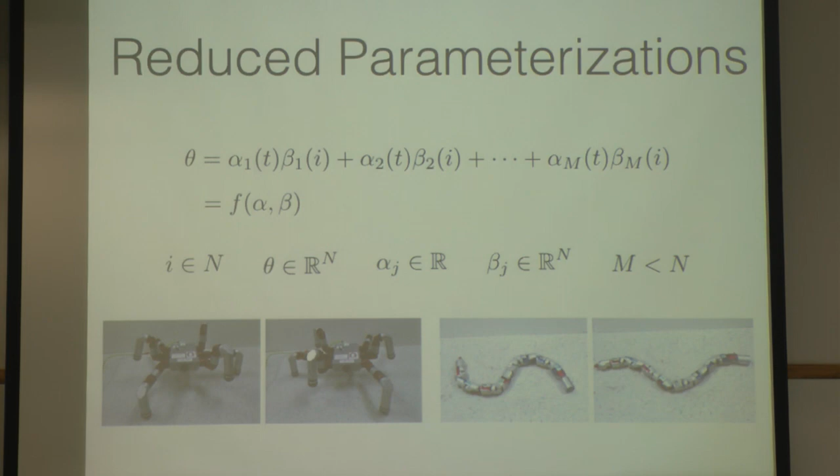So what to do? The prime idea would be to do some sort of dimensionality reduction. Can I take an n-dimensional space, a very complicated robot with an 18-dimensional or 16-dimensional shape space, and project down into a subspace, a low-dimensional subspace of this high-dimensional space? If I can do that reasonably using some sort of basis functions, represented by beta in this case, then I can use similar parameters, almost the same concept, to now define good locomotion patterns in these subspaces, parameterized good locomotion patterns.

So what does this actually look like in a real example? In this space, the basis functions for this walking robot correspond to stances at different portions of my gait cycle. For a low amplitude path or gait through this particular parameterized space, which is a subspace of my overall shape space, I get these small steps. If I increase the amplitude of my motion, I remain in the same subspace - I'm still in this alternating tripod, but now I've used a single parameter to scale up my stride length.

In this case, these shape basis functions are no longer stances in a walking gait. The basis functions are themselves these sinusoidal-looking fixed serpenoid bases. So the question might be, where do shapes come from in general? You've given two examples, relatively simple ones, but if I don't want to just be a serpenoid or an alternating tripod for the rest of my life, where can I go to actually discover shapes in general?

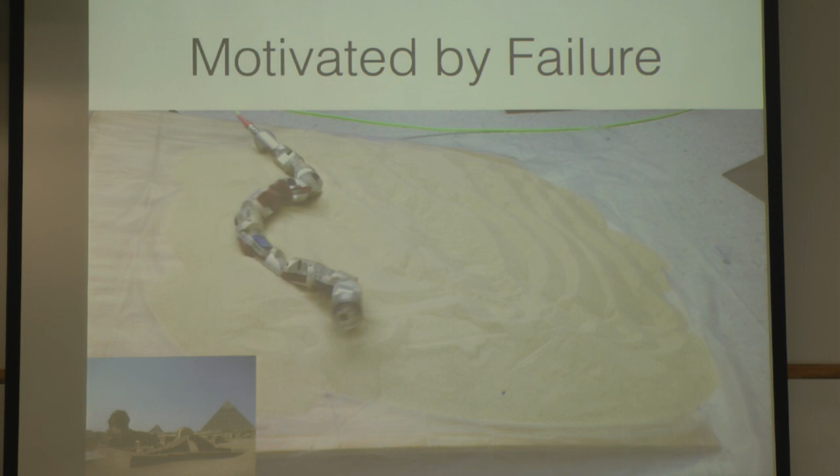It turns out that locomoting with this particular robot on sand, on a granular surface, when it's flat, is not that much of a problem. But when you introduce a slope, it becomes very difficult to move.

So a number of years ago we had been working with Dan Goldman, who's a professor at Georgia Tech. Dan is a physics of living systems professor, actually in the physics department. He's not a biologist, but he's very interested in studying the physics of granular material. Dan had been looking at a particular system and how it moves on sand.

This is a biological snake, a desert-dwelling snake. It's a side-winding snake in general. This snake is amazing — it's not even just going up slopes, it's maneuvering on the slopes.

Another thing is that snakes are principally dissipative, which means that looking at their kinematics tells you almost everything you need to know about how they move, at least in terms of how they change their curvature to produce net locomotion.

Using this fact, we took recourse to the literature, and there's an entire branch of learning effectively called tensor factorization. The nice part about this is that it does a multi-dimensional SVD. So for us, having multiple dimensions, time and space, these types of learning techniques will actually go and learn the basis functions. So what you're doing is projecting a lot of biological data onto a set of spatial basis functions as well as some temporal parameters.

The problem with this — and this is a result that Chaohui Gong had some beautiful insight on — is that when you're doing SVD in multiple dimensions, your choice of basis function in one dimension will actually affect your choice of basis function in the other dimension. So it turns out to be an NP-hard problem.

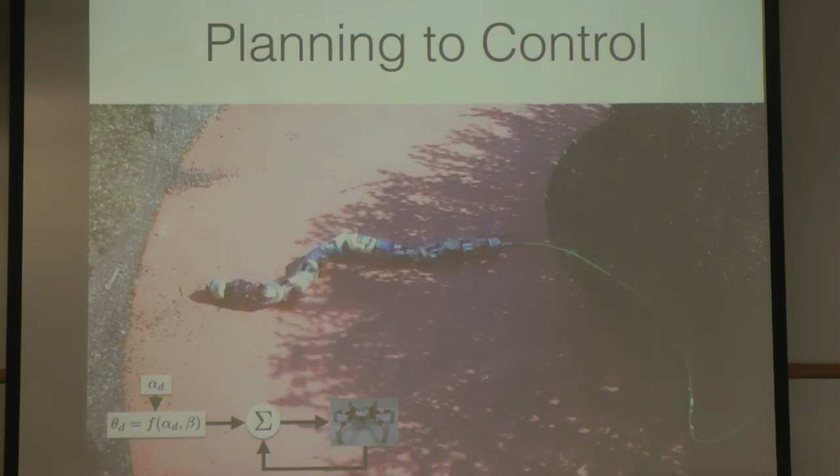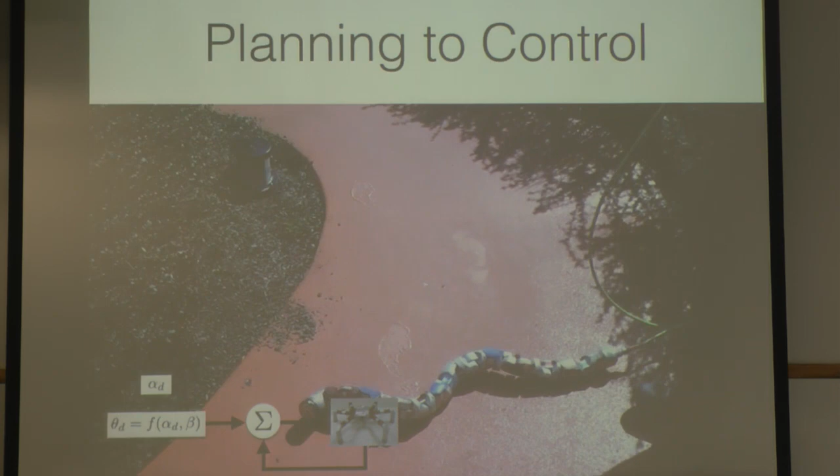This is from a garden over here on campus, with this winding path. So the real question was, what's the good way to go from these libraries of motions for different robots down to actually controlling robots? The first order approximation would be, can I use these low dimensional parameterizations to go and generate desired joint angles that end up being references for low level PID loops, getting sent directly to the mechanism, or different mechanisms.

So what happens when you put the robots in confined spaces?

So perhaps not surprisingly, the robots almost 90% of the time just immediately get stuck. I designed basically a motion for this system in free space, and I put it in a confined space, and not surprisingly, most of the time it spent stuck. Sometimes it'll fortuitously figure out a path, but that does not happen very often. So we again went back and asked ourselves, what's the problem here?

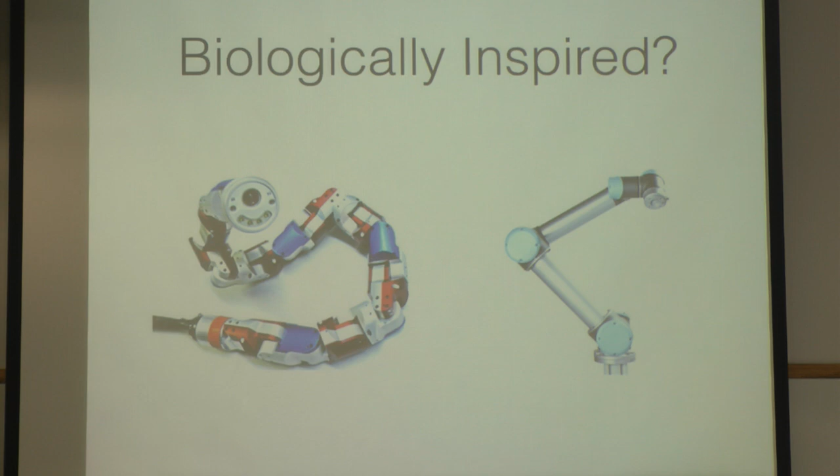It turns out that this is almost the exact complement to what I was showing in that very first video. Where in the first video, I was doing a purely force-controlled strategy. Here I'm doing a purely position-controlled strategy. So in one, there was not enough structure. In this one, there is literally way too much structure. So how do I get around this problem? How do I find a happy medium between these two? How can I be both compliant as well as rigid simultaneously?

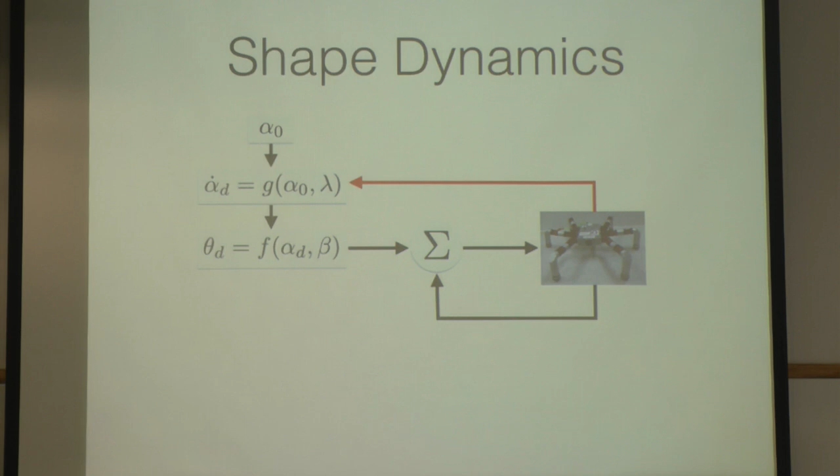For us, the answer was we needed to add another layer in our control paradigm. We wanted to be able to dynamically warp our shapes in response to the external environment. So imagine, from those previous slides, I have this whole family of good locomotion patterns. Can I use some sort of feedback from the environment to take and warp and bend that particularly good locomotion pattern to fit a particular set of environmental circumstances?

It turns out this idea, which we thought was great at the beginning, and we had come up with this big framework for thinking about how to do control — it turns out people have been doing this for quite some time. In particular, the CPG community does something very similar to this, although how the feedback actually enters in is a point for discussion if anyone would like to know more about that.

This is work that Auke Ijspeert has been doing for a number of years. He's done great work in getting lots of different systems — walking systems, slithering systems, swimming systems — and transitions between the two. He's done amazing work in getting these systems to do things like gait transitions, very smooth gait transitions.

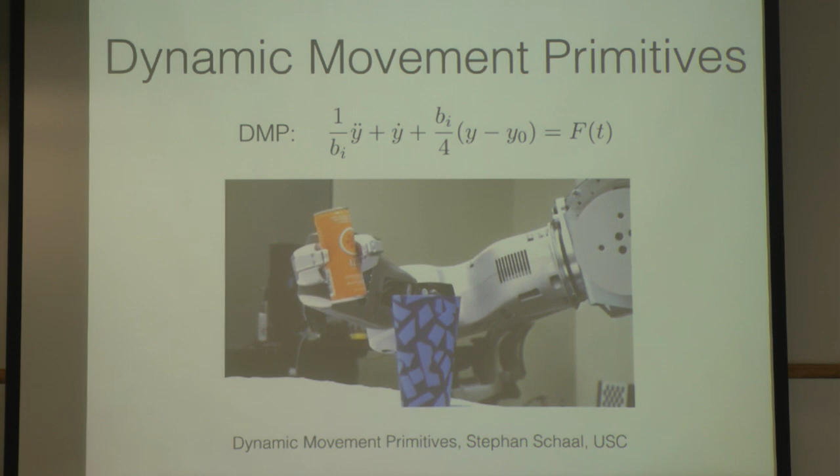Auke wrote a paper with Stephan Schaal in 2012, where they drew a relationship between a broader concept called dynamic movement primitives and CPGs, where a CPG effectively acts like a rhythmic dynamic movement primitive. Dynamic movement primitives are this beautiful idea, and Stephan has been working on them for a very long time. I think the big original paper goes back to 2002, but he'd been working on it before that.

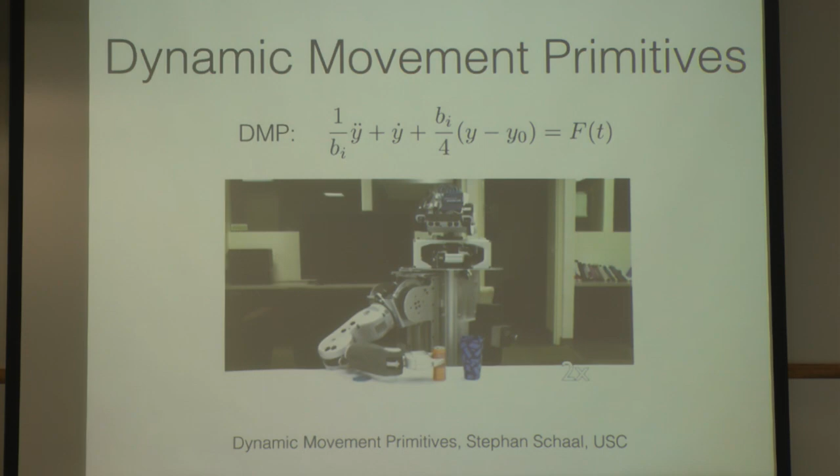The idea behind a DMP is that you can take some nominal behavior, and by changing this function f on the right-hand side of the equation at the top, you can take that nominal behavior in real time and mold it, stretch it, and form it to a new set of environmental circumstances that weren't there when you were originally planning this nominal task. It works ridiculously well, and it works in real time.

In this particular video, the cups can be moved. So you're changing the parameters inside the environment, but the behavior is automatically adapting to them.

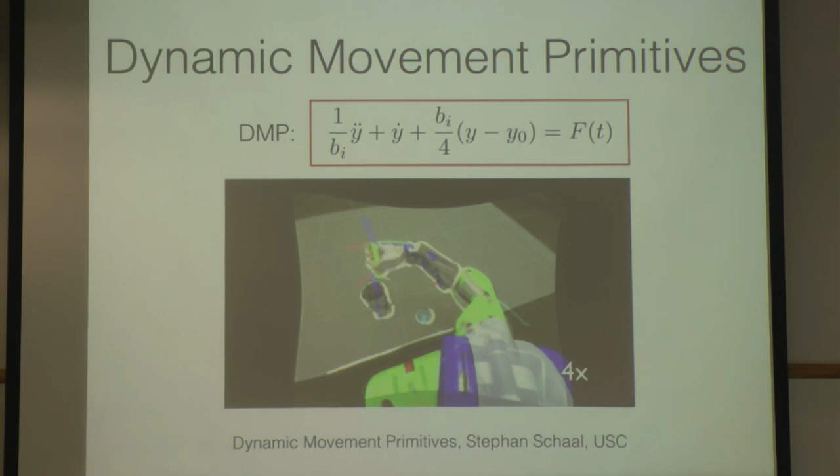The nice part about DMPs for us, in thinking about how to control the types of robots we're really interested in, is you can consider an admittance controller written down in closed loop form. An admittance controller or an impedance controller are actually special cases of a DMP — they have the exact same dynamic form. The main difference is that my forcing function for an admittance controller is specifically defined in terms of a measured joint torque. Same exact form.

So we went and started to try to implement this on the robots, and we ended up with results very similar to what I was showing in that very first video. It was this decentralized version — we implemented it in the joint space, so we didn't have correlation between joints. They weren't sharing information.

You end up with this very decentralized system, and it turns out to work decently well, but there isn't enough structure for the system to continue moving while being compliant. So how did we get around this?

We go back to our shape functions. The whole idea here, to remind you, is that we project ourselves onto some low-dimensional version of our overall shape space. So we're giving up some articulation in this projection, but we're building structure directly into how we specify these functions, and further structure into how to move well in these reduced dimensional spaces in terms of our alpha parameters.

We now effectively have a change of coordinates. It's not a change of coordinates from the workspace to the joint space, but it's effectively equivalent — an analytical function that tells me the relationship between these two spaces. I can use this change of coordinates to project my compliant controllers from this high-dimensional joint space down into this low-dimensional shape parameter space. So I can define compliant controllers in this subspace of my overall joint space, building in the structure of the subspace itself as well as good locomotion patterns within it.

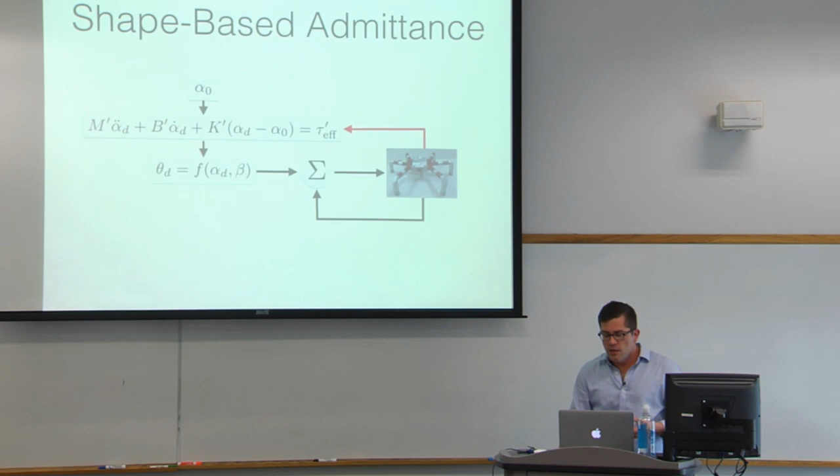So to be crystal clear on what's happening here, I'm adding a middle layer of control, functioning like an admittance controller defined directly in terms of some shape parameters that are regulating around some nominal parameterization, alpha sub 0. Those are then getting transferred back down to my lower loop control — my robot is regulating around desired joint angles, which are changing at every time step as I'm moving through the environment.

You can make a similar idea work now for basically the height of the chassis in this walking robot. It has an alternating tripod gait going on, but the phase of that gait is always set to be 0 — so both sides are in stance.

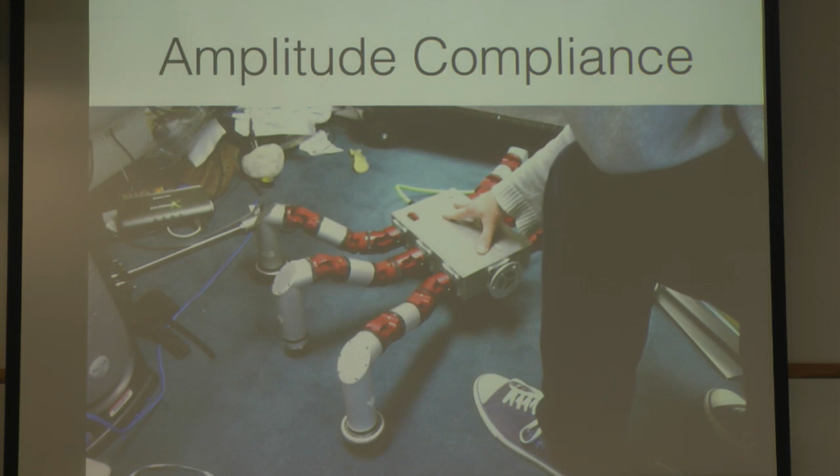As I start to pull and push on the robot — and in truth, this is a function of the resolution, at one point I pick the body up and it doesn't go back down under the force of gravity, but that's because it can't sense it, not because the controller doesn't work — this is basically adjusting the height of all the legs simultaneously.

Same idea, different robot. Good question — yeah, sure. Were you moving it side to side also? Yeah, so it's doing, yes.

Basically what that's demonstrating is the actual mechanical compliance in the system — that part did not come from the controller. That's exactly correct. Although if you started to pick it up like that with just the mechanical compliance, the legs would come with you, and if you pushed past a certain point down, it would start to fight you dramatically.

The title of the talk is not shape-based compliance of a robot sitting on the ground, it's shape-based compliance and locomotion. So what happens when we turn on the phase of our gait?

In this particular example, you can see the robot starts out with a very large amplitude in this waveform. As it starts to contact that first peg, the forces of the robot interacting with the pegs start to squeeze the amplitude until the robot's shape starts to resonate with the peg spacings. This is just a function of running a single amplitude admittance controller, and you get this nice resonance — it'll swim through these pegs very efficiently.

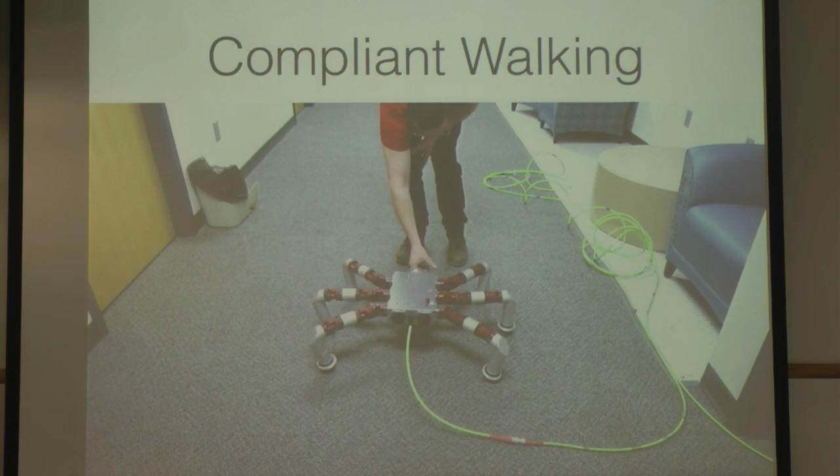A similar idea now works with the walking robot. In this case, the stable behavior is set to be around a 0 amplitude walking gait. As I start to pull on the robot, I'm increasing the stride length. The nice part is at the next time step, when I push back on the robot, it'll actually start to walk backwards — it's a compliant behavior designed around 0.

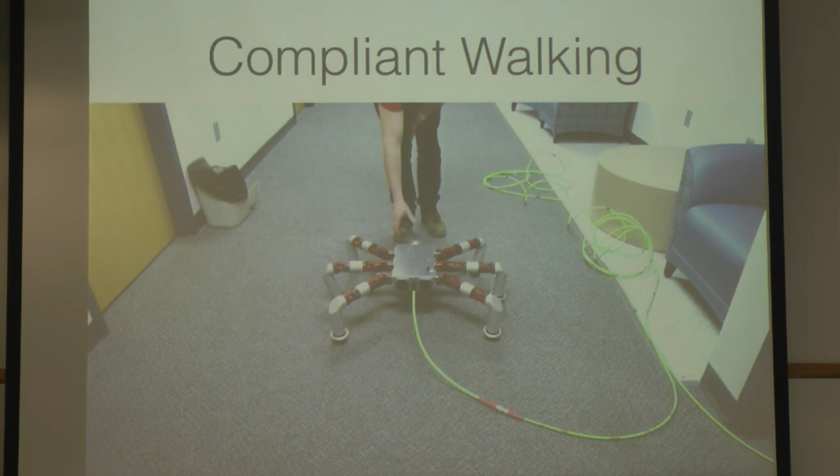So when I pull, it'll walk forward; when I push, it'll walk backwards. And again, this happens as effectively regulation on a single parameter — I'm controlling these 18 joints.

So, a lot of people have asked, right? It's great, you can go and adjust amplitude over an entire shape, globally controlling amplitude. What happens? You were stating that you're ultimately interested in working in systems in cluttered, complex environments. If you go back and look at biological systems, biological snakes, you see that they don't ever really do this kind of global amplitude adjustment.

They're actually doing something that's much more local. They're always locally, especially around the head, forming their shape to the pegs and then passing that shape back. This led me to start thinking about what would be the best way to represent these types of kinematics effectively. So we thought, this is basically just doing amplitude modulation.

So it looks like you're not getting constructive and destructive interference of these waves. It looks like a shape forms and gets pushed back. So it led us to think there must be some sort of fundamental underlying frequency with which these waves are getting pushed back. Let's call that a carrier wave that has some particular frequency.

Then let's think about having different amplitudes at different points of the body by coming up with a modulation signal for this carrier waveform. And then let's go and actually put that on the robot and see what types of shapes that we can get.

So indeed, by allowing the modulation signal in the waveform to have the same frequency, you can get these exact type of kinematics that, well, not exact, but similar kinematics to what you see in the biological systems, at least with respect to being able to push shapes back down the body.

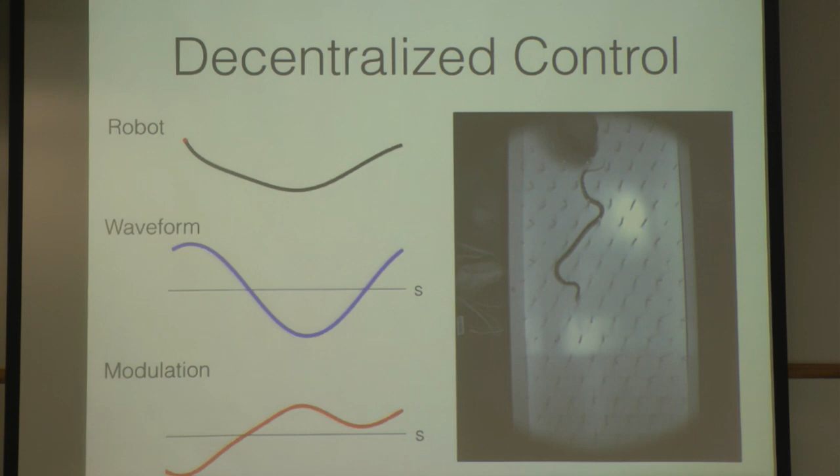I won't bore you with too many of the details here. The way that we actually implemented this was using Gaussian-based activation windows. Each activation window has its own amplitude. By setting that amplitude independently in the different windows, you can start to get kinematics that look like this.

So what happens when you go and now use this new definition of a shape function to go and derive compliant controllers? As you might imagine, this gives me the ability to independently modulate the amplitude, compliantly, in different portions of the body. You don't lose anything that you had in this sort of global controller, right? You can do the exact same types of compliance, but what you get is a higher degree of articulation.

So this started to work. It started to get exciting around now because we could no longer get the snakes stuck. With the position controllers, we no longer really had those problems. You can see its body will start to literally just wrap around the pegs based on the external forces. This works really, really well. We've done several different variations of this subsequently, but these were exciting times.

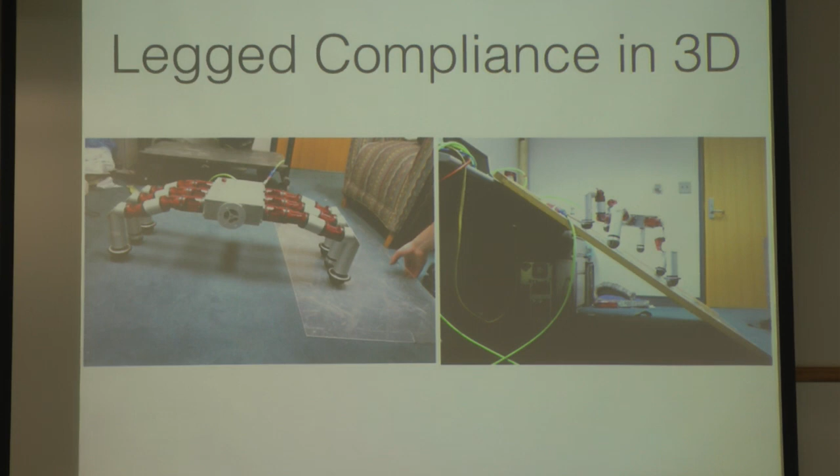I won't go into any of the mathematical details in this talk. If you want to talk about them, I'm more than happy to. But instead of just scaling up and scaling down these amplitudes within a particular basis space, you can actually do things like start to rotate basis functions. Here you can sort of see the leg shakes, which is the end result of using SEAs.

The cool part here is that I'm now defining a different way to specify the shape function. And what this allows me to do is actually rotate the basis functions themselves. If you're one of the more astute control-y people in the crowd, you might notice that I'm actually doing positive feedback here. So when I start to apply a force on one part of the body, it'll actually start to push back on me, which allows me to level out the body.

You might be asking yourselves, why don't you just do this with an IMU? We have IMUs, that's a good question. It was more... IMUs have their own problems, especially if you're walking around in super complex terrain and you're bouncing around a lot.

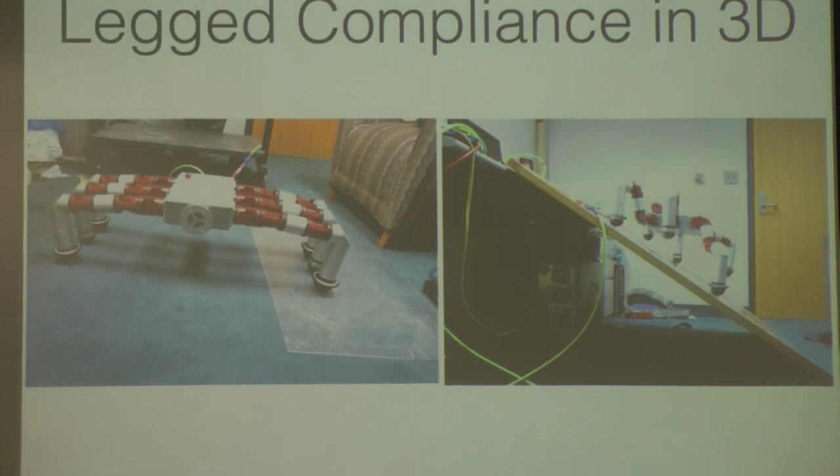So we wanted to see how far we could get just based on trying to equalize forces out in different portions of the hexapod's body.

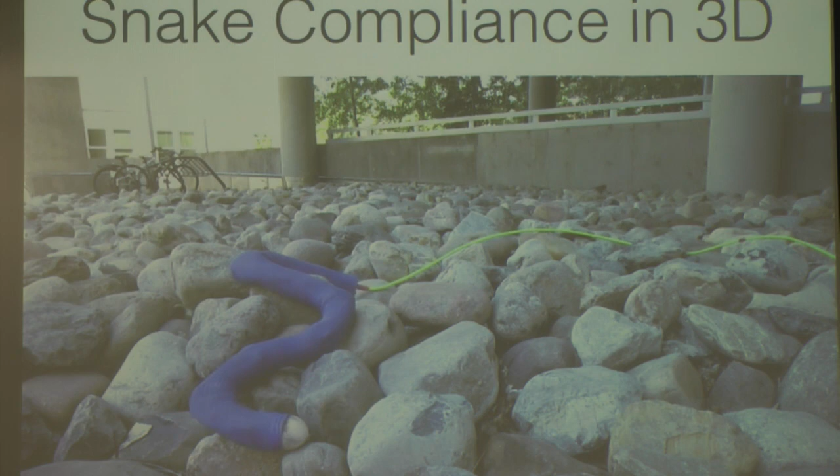The other cool part about this is that it's effectively just as easy to control the compliance as it is to control things in 3D. So here, you effectively have a torsional compliant mode, and I'm not going to include any of the math that makes this work. I'd be happy to talk about it—it's in an RSS paper I'll be presenting in a couple weeks.

But again, this is just a slightly more complicated way of specifying a shape function. The nice part is how you derive the shape-based compliant controllers is exactly the same—you use the fact that you have a change of coordinates, and you can project torques from your joint space into your shape parameter space.

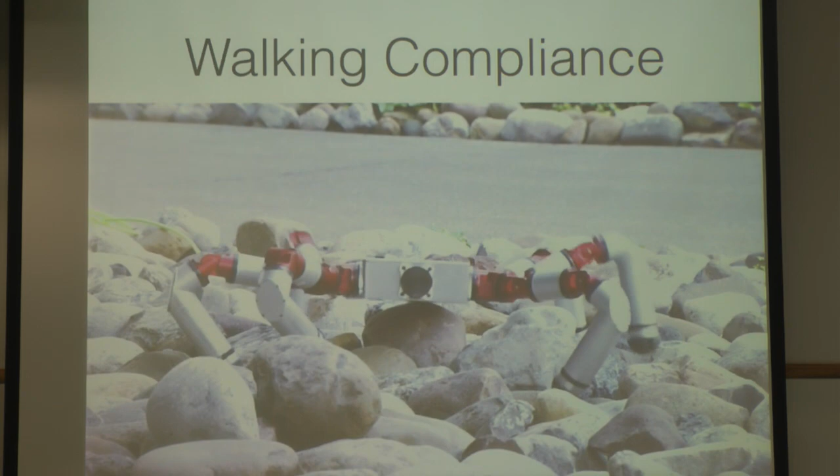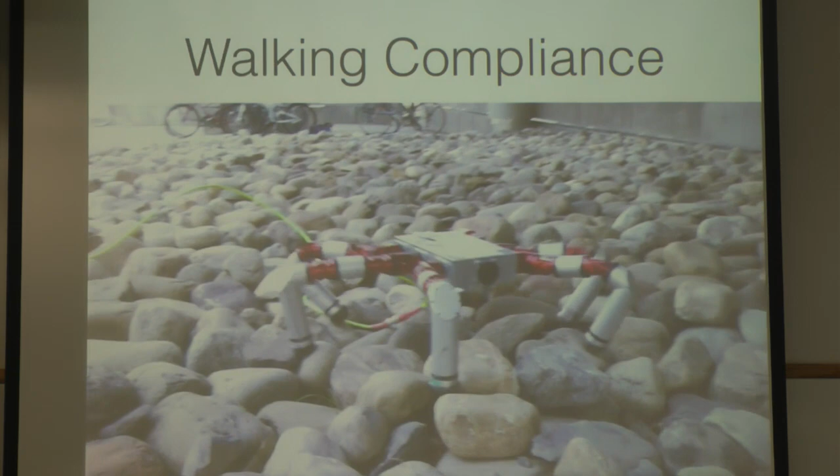So here's a similar idea of the hexapod, now regulating its orientation as it's moving through a pile of rocks. I didn't mention it, but the robots are all blind in all of these experiments—they don't have any map of the environment. It's all basically a regulating closed loop controller, just feedback control, and you start to get pretty robust behaviors with respect to moving around very complex terrains.

So, starting to wrap up what we've been working on. We asked ourselves very recently, and we just submitted a paper on this, can we take this a little further? What else can we do with thinking about compliantly controlling these articulated mechanisms? So we started to ask ourselves, can I actually start to use compliance or proprioception to start controlling things like behaviors.

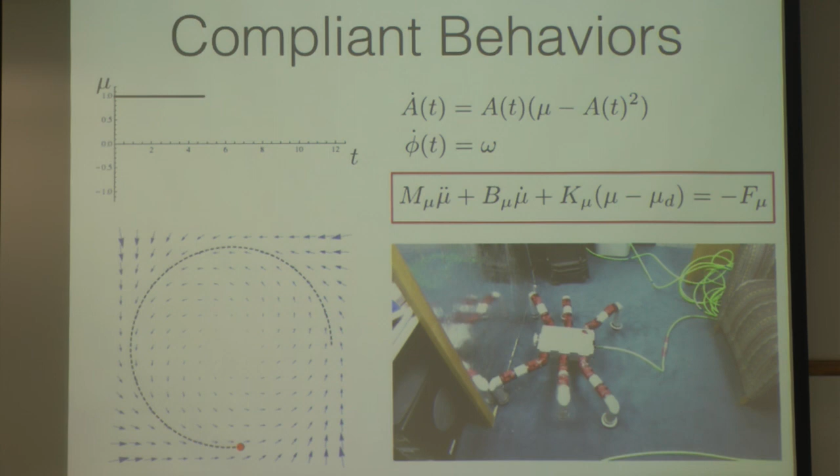What this means experimentally is that when I have the system walk into the wall, it will go from having a stable limit cycle, so stable walking, to a stable stance—a node in this space represents a stable stance. If you look at the vector field, you can actually see when this happens. The properties of the vector field—literally I'm changing the stability properties in the behavior space, if you want to think of it that way—using just proprioception to actually cause the trigger.

So then you can take this one step further. Truthfully, realistically, this is just acting like a finite state machine where there's two states. The nice part about what I'm about to show you is that this gives you a very nice way to interpolate between different behaviors—literally your joint positions in one behavior and your joint positions in another behavior.

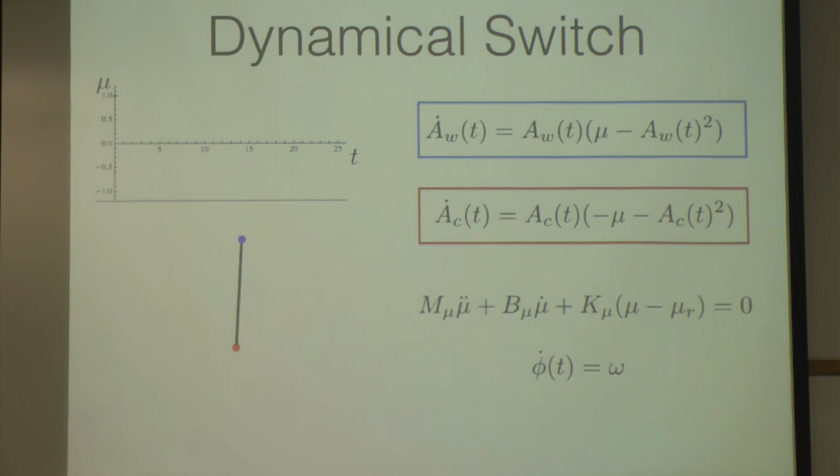So we took the idea in the last slide one step further, which is to say we now have multiple different behaviors, and both behaviors are always on—one behavior is always in a stable stance, while the other is always in a stable limit cycle. So when the value of mu changes sign, the stable limit cycle goes to a stable node, and the stable node goes to a stable limit cycle. So you switch behaviors.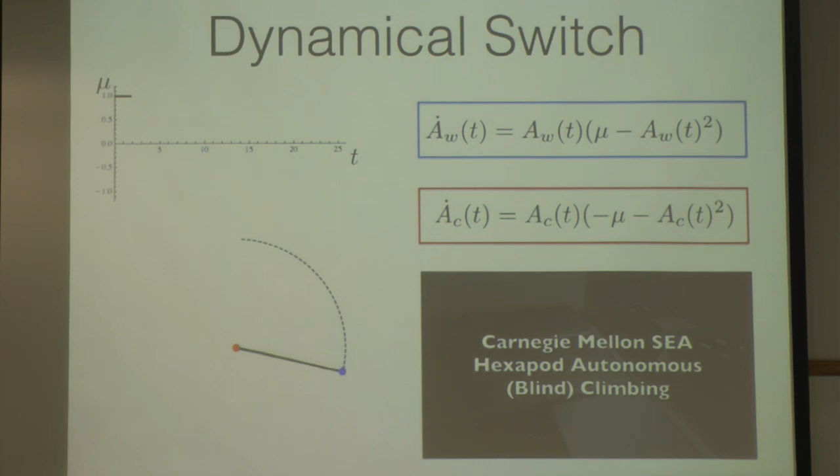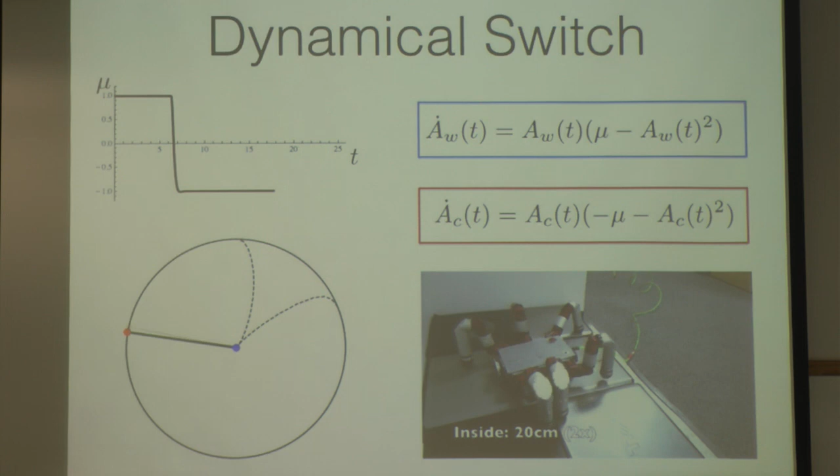So what you can use this to actually do—same behavior as before, I'm going to have my hexapod walk up, run into a wall, except now instead of stopping, I'm going to transition into a second behavior, which is a climbing behavior. So I end up climbing, and what you can notice here from the blue and red dot is that both behaviors are always on. Then when I actually get up onto the top of the obstacle, I switch back into my walking gait.

The other cool part about this, and I'm showing lots of different heights, is I actually create a stack of these compliant behaviors. So there are multiple tiers—there's effectively a DMP running around the climbing behavior.

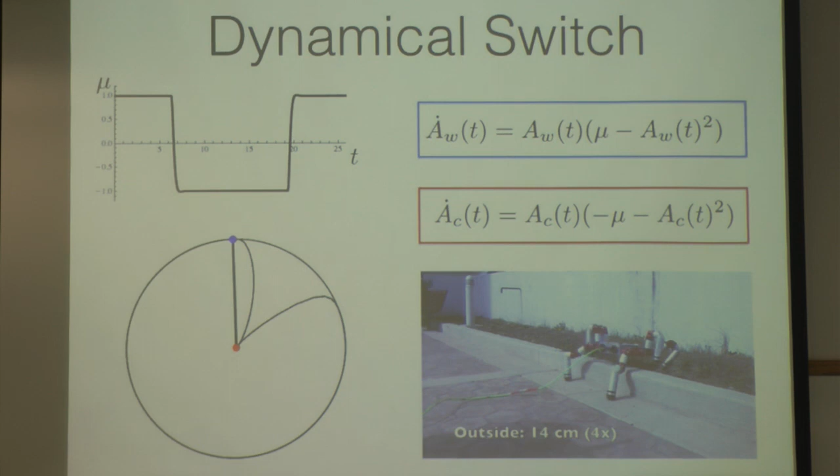So the system is set to nominally climb 16 centimeter obstacles, but it's always adjusting the height based on when the front leg first touches down. If the front leg touches down and the height is higher, the system will actually push the body higher. So it's scaling its behavior based on proprioception.

So for future directions, where's all this stuff going? Hexapods are great, snakes are great, but where are you going with this? We've done serial topologies, we've done network topologies. A big direction here is going into continuous topologies. So how do we differentiate from the stuff we've been doing? What's the next cool big thing?

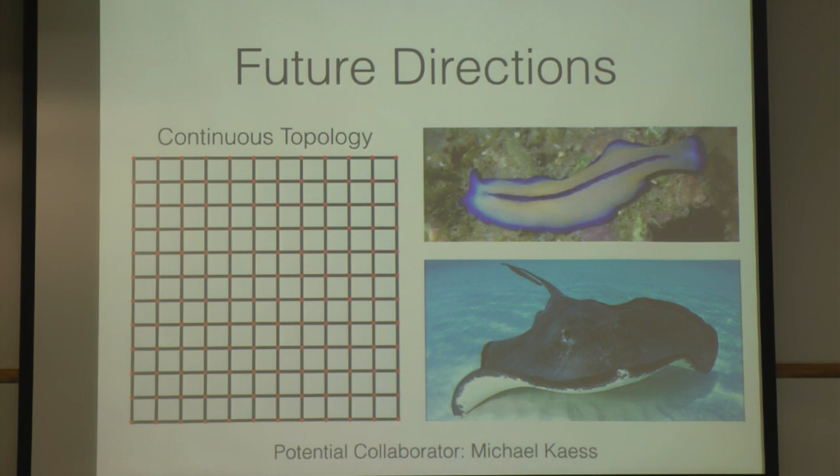Typical example systems would be something like a flatworm, shown at the top of the slide, or the swimming stingray at the bottom. Some cool questions that come up when you go from serial or network topologies to continuous topologies are: how do you apply the dimensionality reduction techniques we've used successfully to systems with multiple spatial dimensions? What are shape modes for these systems? How do the shape modes interact?

A very interesting problem is, we sort of ignore this in the snakes, but because the system can bend this way and that way, there's actually torsioning, right? There's an infinite number of copies of SO3 along this backbone. With snakes we mostly ignore this, but when you start controlling surfaces, you have copies of SO3 happening in multiple dimensions, so you really have to think about how to geometrically specify shapes for this system.

That's interesting. Some other stuff: information flow, representation, and estimation. If I really want to build and control these things, I have to worry about how to share information. In my snakes I had this amplitude modulation - what does that look like now in 2D? Do I need to propagate information left, right, back, forward? How do you estimate curvature unless you have sensors everywhere on your sheet? How do you do estimation in a reasonable way?

Something I haven't talked about at all throughout the talk - you might be wondering, if you know about the SEAs, have we done anything cool with passive dynamics? If I have mechanical springs distributed throughout my system, can you do something cool with that? The answer is we have not previously, but in the future I would definitely like to.

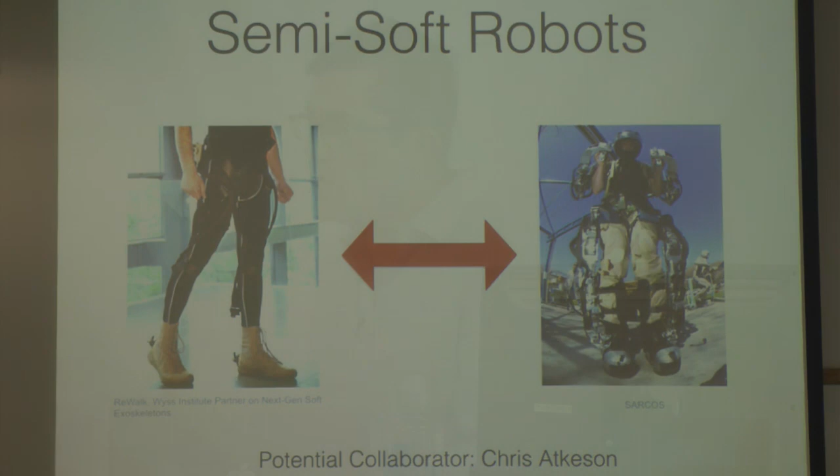I think ultimately soft systems are great, and we've gotten a lot of mileage out of typical robotic systems, but somewhere in between is a very interesting space. How rigid do you actually need to make your system? How can you make it semi-soft, semi-rigid, and take advantage of passive mechanics in a really smart way? I think that's a very interesting direction.

The same type of problem might apply to trying to do coordinated transportation using multiple highly mobile systems, right? So each of these systems, like when I was showing the hexapod walking over the rocks, right?

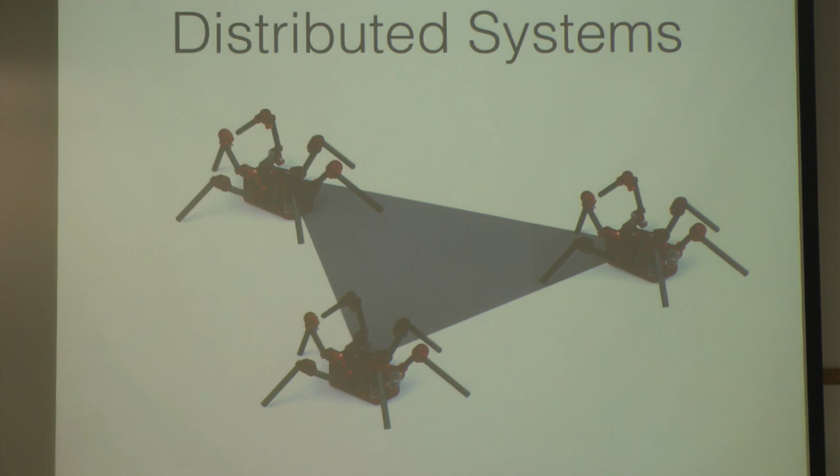It's a very compliant behavior, right? That's how the system is so robust. What happens if you now rigidly attach a bunch of these very compliant systems to each other via some rigid object, where you now have this exact same problem of how to be compliant while at the same time satisfying some sort of rigid constraints.

So the last one here is this idea of using shape bases. It's shown up in several different contexts. In locomotion, and in manipulation, it's shown up under the name of kinematic synergies. So synergies get used for a lot of different things—there's muscle synergies, kinematic synergies.

So in the manipulation literature, you can think of my shape bases as effectively equivalent to kinematic synergies. It's the same sort of idea, except instead of having stable stances like I had for my walking system, they have actually stable grasps. So you can think of these as like eigengrasps.